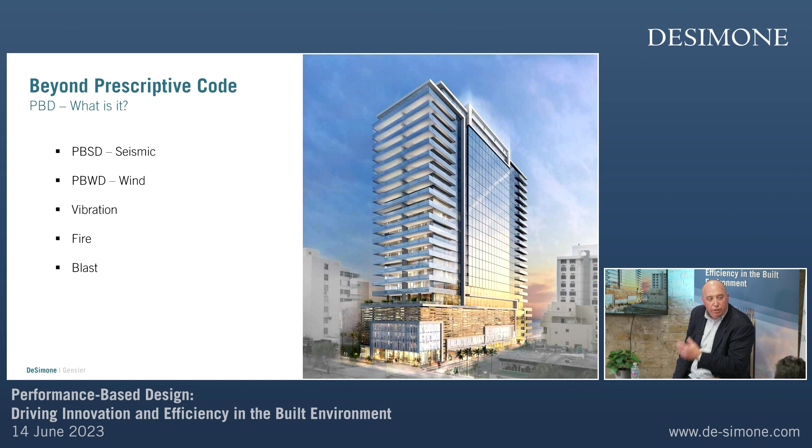What I should mention is some of these things I'm going to bring up from my past work with other groups, but currently in our office right now, we have two projects that we're doing as performance-based seismic design. This is a residential tower in Salt Lake City, which is a pretty high seismic design code. And then also a job in Puerto Rico, another condo tower that we're doing performance-based seismic design on.

And wind. A few years ago, when I didn't have much more hair, but I had a little bit more hair, all right, and I don't get any money from selling these CTBUH publications.

But Jeff was involved with this too. And since this was about 2015 or so, we put out this publication. The idea here was there was a lot of performance-based seismic design projects that had been done, and we wanted to show something that was a little bit more helpful with guidance.

So there's good examples in this, and I would say that we present it in a way that developers can read it, architects can read it, so that they can become a little bit more knowledgeable about what structural engineers do when they approach, and geotechnical engineers, when they approach one of these problems.

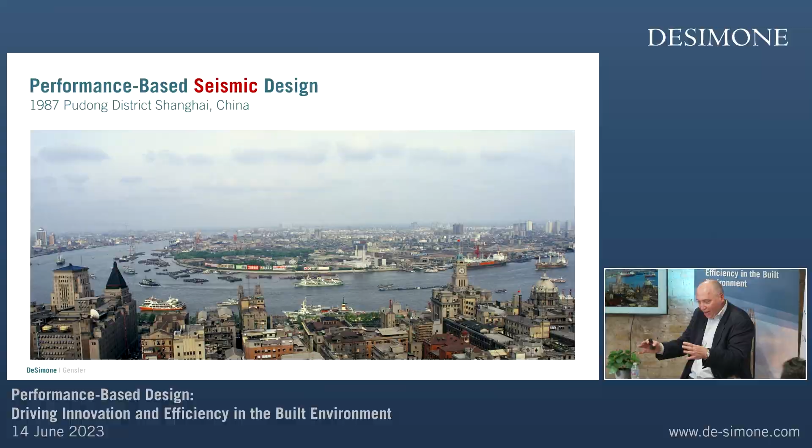Now, my background's a little bit less traditional than most US engineers who get involved in performance-based seismic design, because most of those guys hang out on the west coast of the US, like Jeff, and they're kind of in that huddle doing a lot of work on the west coast that's very specific to that region of the US.

My experience dealing with this issue was really when I began my work at SOM. So when I was in SOM's office in Chicago in the early 90s, they did a lot of work in China, and they started a whole number of different projects there. This was one of the first projects that was done there and used as a benchmark.

This is just 25 years later. It's a whole redevelopment of the Pudong district, was the Jin Mao Tower. The Jin Mao Tower was this kind of 88-story, very repetitive type of setback system. And this was used as a benchmark.

And really, you look at this building, many of the buildings that were done that were taller, like Russell, I think you actually worked on Shanghai Tower. I touched it, I didn't really work on it. Okay, it was already designed. I need to give you a new photograph of that.

Well, this was in 2013, and really what it was meant to show was how much things change and how many projects like this were being done in China. So that was my exposure, and also the whole evolution of the process. What it took to get Jin Mao through the design process and through the expert panel review and the peer review was far less extensive than by the time Shanghai Tower came along.

So why would we do performance-based seismic design? Most of the time we're mandated, we have to do it. Within the US, or if you're using IBC, International Building Codes, there's definite limits on heights of buildings and systems that you can apply in a high seismic zone. So in tall buildings in high seismic zones, or buildings that have unusual structural systems, you sometimes are mandated to use a performance-based seismic design.

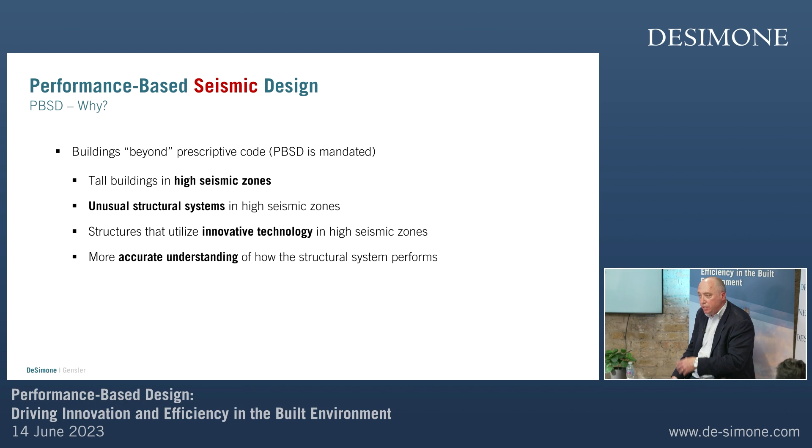If we're talking tall buildings, then we look at what are the regions of the world, where are the high seismic regions, and how do those correlate with large metropolitan centers. The ones that stick out in my experience are Southeast Asia, obviously, and then also the west coast of South America, Chile and Santiago. They're having large scale events on almost an annual return rate.

So in an area like that, the expectation by the public is not that you're going to design a building, and collapse prevention is a realistic goal. You want to be able to walk in that building the next day. And the only way you can accurately assess that is by doing performance-based design. And then also the west coast of the US.

And just to give you an idea, this is the Sendai earthquake. I just grabbed this off the internet, 2011. Gives you an idea of what kind of movements you're talking about with tall buildings. The thing that's interesting about this is many times seismic might govern, not necessarily - if you're in a high region, if you're close to a fault, of course you're really worried about it.

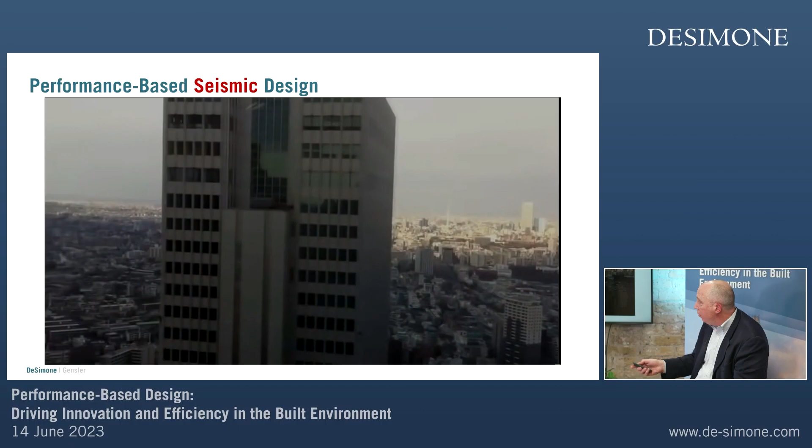But like for instance, if you look at a zone like Dubai, many of the seismic events that occur in Iran actually influence the seismic criteria you need to use for design there. And that's a couple hundred miles away - I don't know how many kilometers.

All right, so conventional wisdom, we grade these different structural systems.

We say like a bearing wall system—is this good, if we saw a rare seismic event, how well would it dissipate the energy of a large earthquake? How would it ductilely respond to it? And how can you—this is somewhat experimental. This is the current approach for prescriptive design.

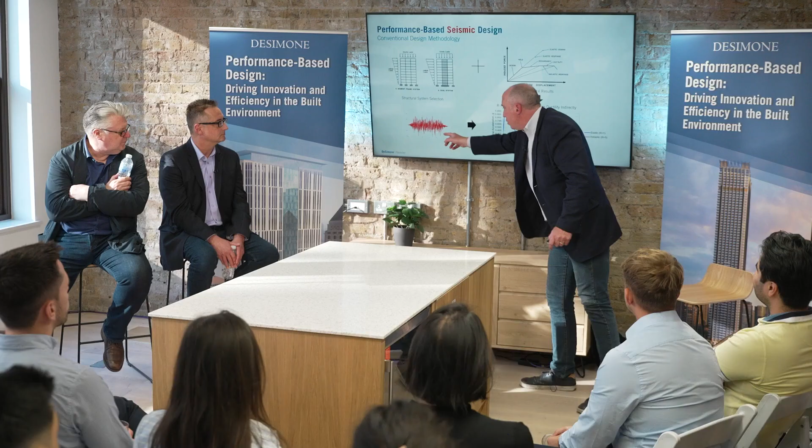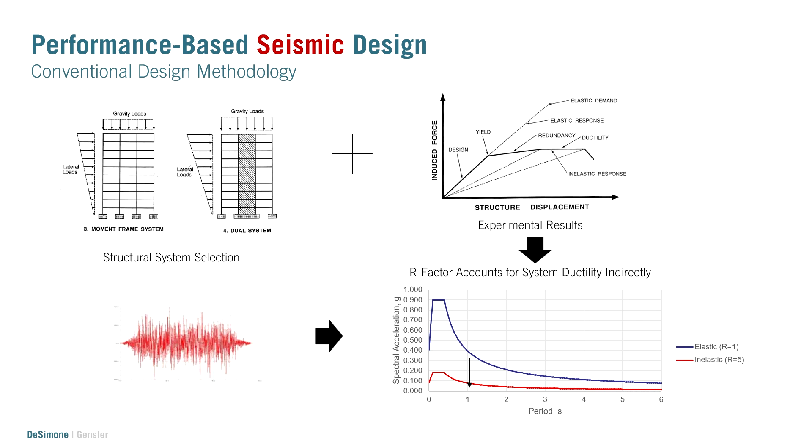So you see a time history record here, and whenever you see a time history record or a series of them, it gets represented in a response spectrum. That's kind of like an envelope of the responses a building could have based on all the ways it could vibrate. And we use these gradings of different structural systems to figure out how we can reduce the seismic loads because the building's going to respond ductilely.

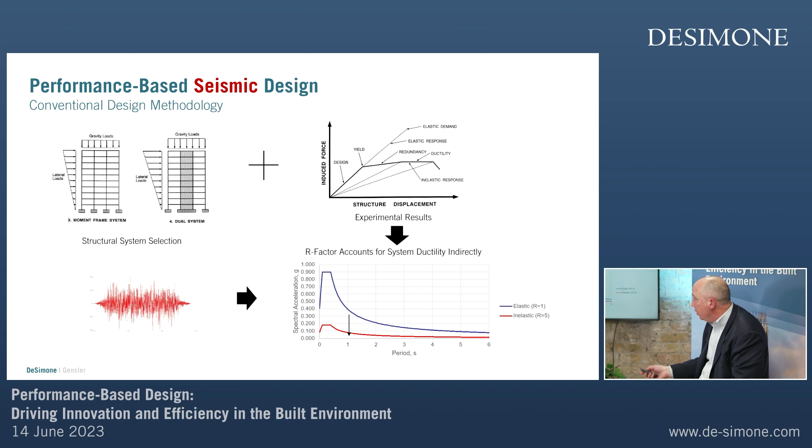It's not going to see the full elastic, the full force of the full G's of an earthquake. It's actually going to respond in a way where it's more ductile and the loads are reduced. So the better the structural system, the more ductile it is, the higher value we reduce that response spectrum when we do conventional design. So what are the disadvantages with that?

There's a value, that reduction factor is a seismic reduction factor. It's this R value, and it's used in Eurocode as a Q value—kind of a similar concept. And it's qualitative, it's less direct, it's less accurate, and it has less definition of areas where special detailing is required. You just kind of think about those areas, but you don't directly assess where that ductility occurs. There's less freedom with definition of systems.

And then you hit something like this: you have a bearing wall system, you read in a catalog, its R value is 4 or 5. What would you even call that? You don't even know—CCTV would be like something that would not even fit into any definition.

So there was a quantification document that was put out where they attempted, when computers probably didn't have the same computing power, to define those types of systems that didn't fall into the regular list of structural systems. But by the time you get to the end of all this work, it's almost like now you should just directly assess things.

And so what we opt for when we're doing performance-based design is we just take that same time history, instead of going through the response spectrum, we're putting it into a building model that has all this direct ductility of link beams and walls directly modeled.

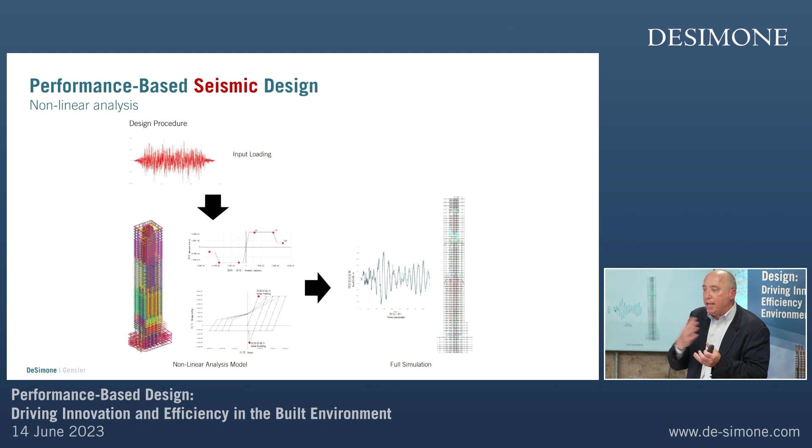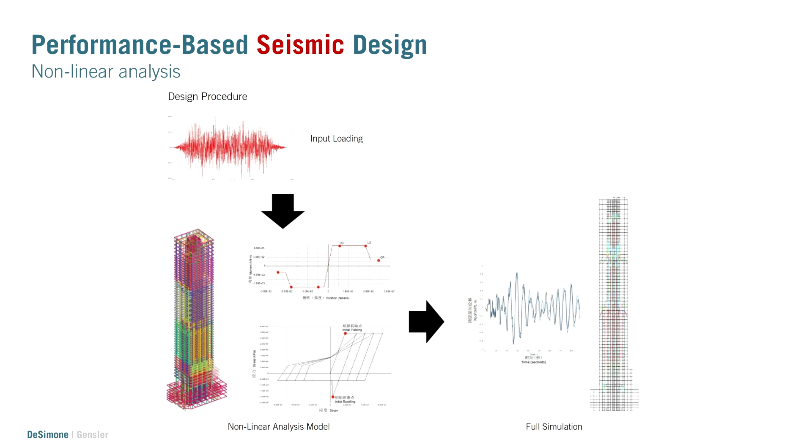So the building's not responding elastically anymore. It's not a linear approach. We're actually seeing some of those elements fail—they're not failing, but they're cracking and yielding. And that is the actual development of the reduction and the ductility in the structural system.

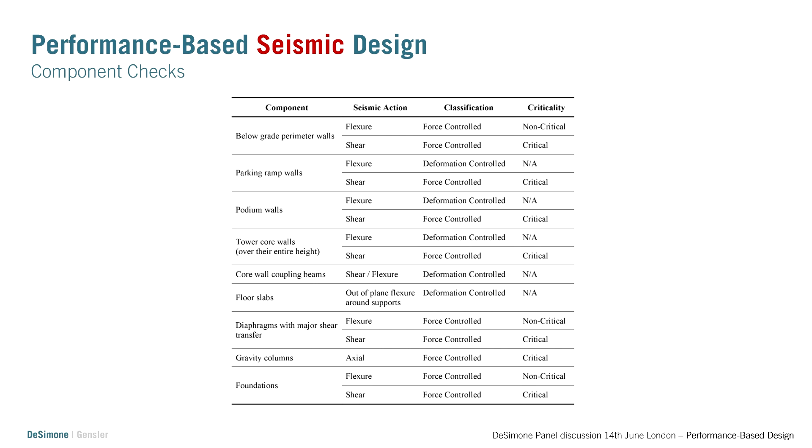And then we keep track, all right? And then looking at all these elements, there are still some elements when we do the performance-based design where we're looking at them as being force-controlled elements. So those are strength checks, the same way you would do a normal strength check in a building, and that would be like for gravity columns—things that we don't want to actually yield or see any kind of cracking.

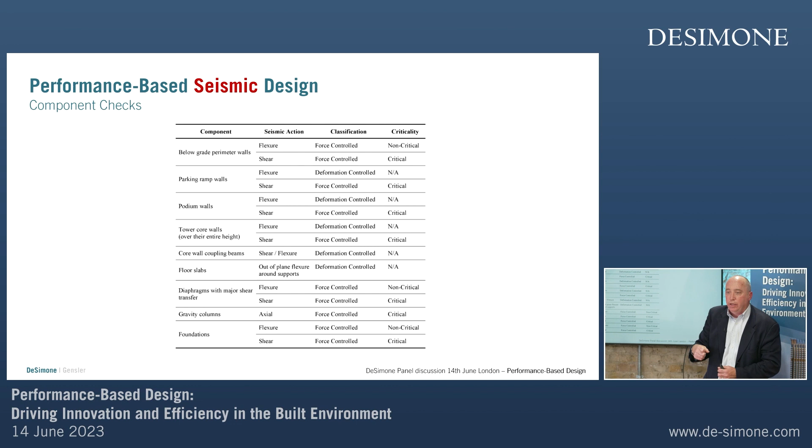But elements you intuitively think about, like coupling beams, will have a lot more deformation in them, and you'll see a lot more ductility. Also in tower core walls, yielding of the vertical bar, hinging. And that allows the building to respond in a way that's safe and offers a good fuse point that we can investigate in detail.

When we do performance-based design, it's a two-step process. Usually we look at time history records that are correlated with the green response spectrum, and those are like 75-year to 100-year events—the building is intended to respond elastically, nothing goes nonlinear. But then we look at the rare events, which are like the 2,000 to 2,500 year event, where all of this ductility is actually developed.

And these are similar return periods to the Chinese code—so that's why you see all the translation there.

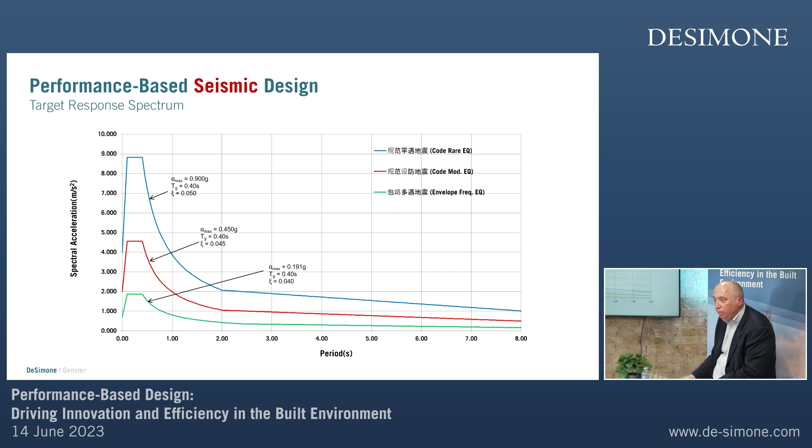So kind of the lay of the land in the US: traditionally prescriptive loads, prescriptive codes deal with these R values, these seismic reduction values. There's height limits for certain systems in high seismic zones. And performance-based seismic design is not just done for new construction when you're over limit—you also will do it for retrofit sometimes. And there's a particular code dealing with that.

Eurocode 8 has similar prescriptive rules to the US with these seismic reduction values, but they're called Q values rather than R values. And as I know it at this point, there are no height limits for certain application of different systems.

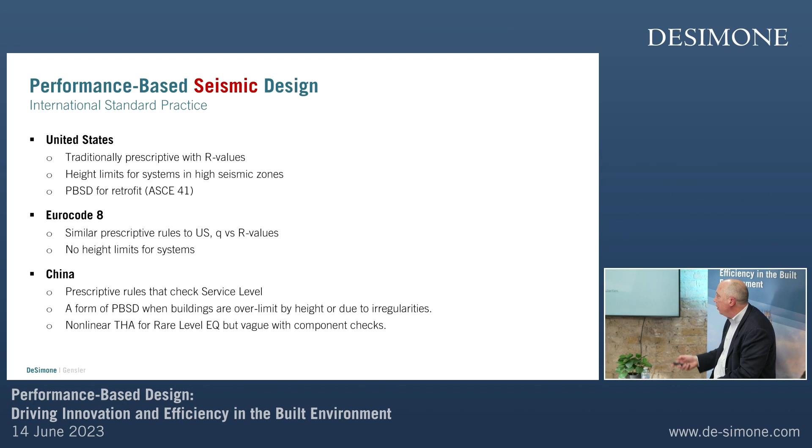There are good publications with a long history of being utilized for this. The TBI peer document steps through a process for tall building design when you're doing nonlinear analysis. There's also other codes, like the Los Angeles Tall Buildings Structural Design Council document, which they've kept updated. It's very similar to TBI, but has slightly different guidance. The big boost for this as a design process has been ASCE 7. The 2016 version actually had nonlinear analysis and performance-based design included, and that's now been enhanced in the 2022 issue.

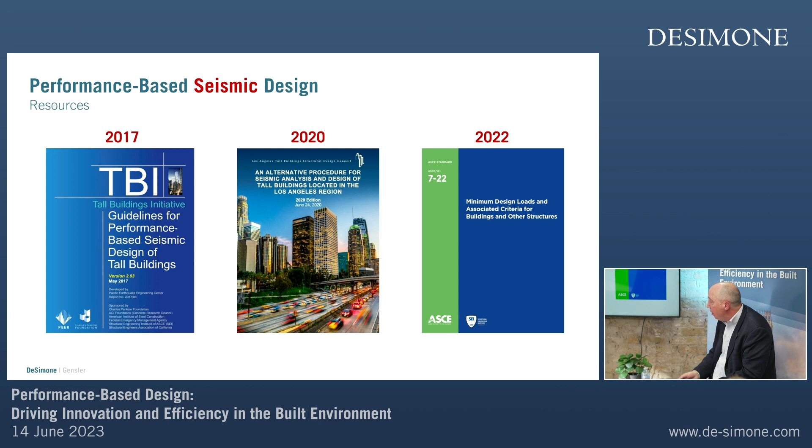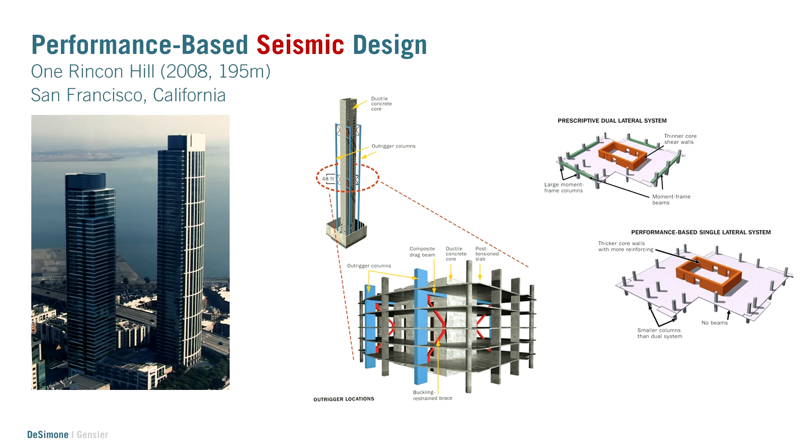Even though some form of performance-based design was being utilized in the US in the late 90s, this is a classic example of why you might want to utilize a system like this. Similar to London, any residential tower project that's a post-tension slab with a bearing wall system, you want to limit the number of downturns in the formwork, because any extra formwork is very expensive. This would have been cost-prohibitive and a restricted system in the San Francisco area prior to the development of performance-based design, because to get a code-compliant building, you would have had to add a ductile frame on the outside, which would have been cost-prohibitive. So by doing performance-based design, you're able to get something like this through the approval process.

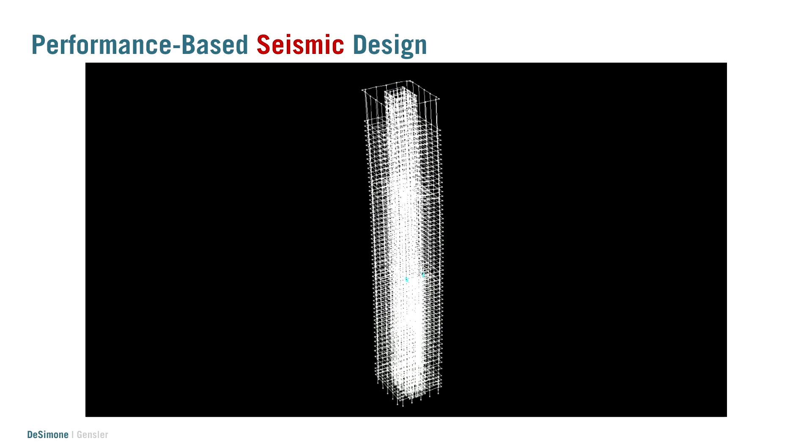This is a building we did for Samsung headquarters in Beijing. The interesting thing is we pursued the idea of innovative design, so we looked at a couple different options for the client, Samsung. Instead of just using outriggers and a belt truss at the mechanical levels, we actually used the idea of viscous dampers there.

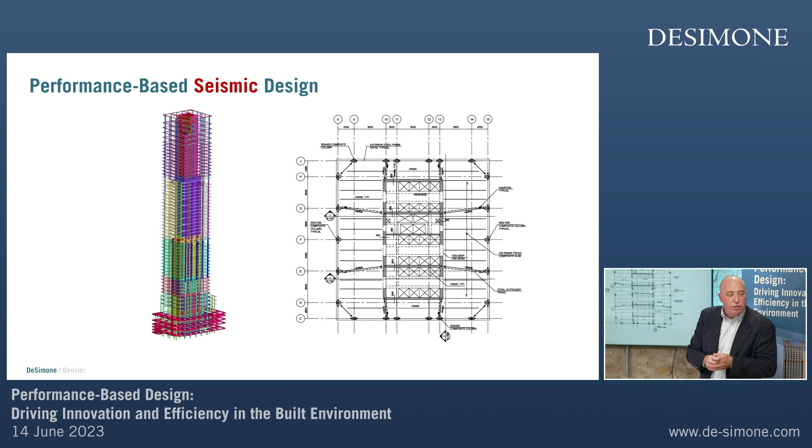Viscous dampers are hard to model statically because they only pick up load when there's velocity, so you really need to take them through a time history analysis to see how they'll respond.

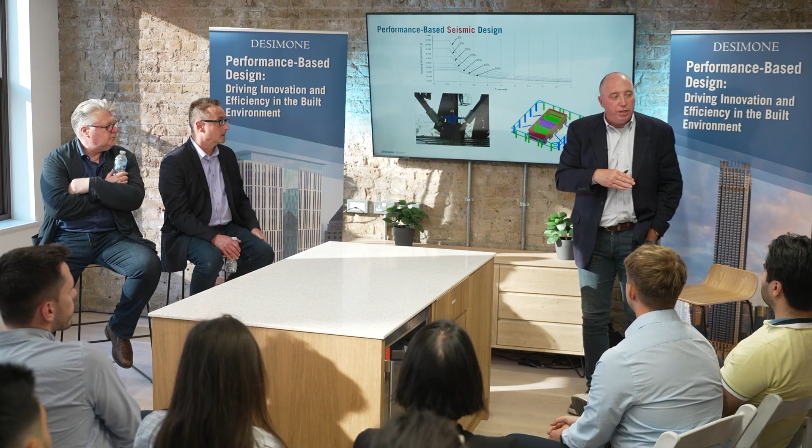Yeah, so they use these hydraulic systems. This is what they look like. They used them on Torre Mayor in Mexico City. That's a pretty old building. Yeah, but there they were used more just in the exterior frame to get an additional amount of damping.

When you look at damping in systems like this, it has the same effect as reducing the seismic load with a higher R value, because you just drop the response.

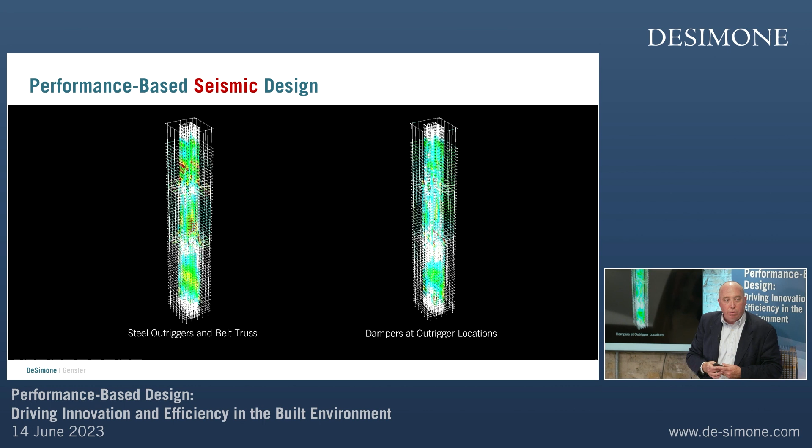What we were able to prove to Samsung, the client, was that if we do a conventional steel outrigger and belt truss system, you see a lot more red there, which equates to more damage you'd see for the same seismic event. The building would respond more linearly with the viscous dampers in play.

Another way to illustrate that is to look at the total energy dissipated by a rare event. The viscous damper system has a longer period for the building, so it actually sees less total energy that needs to be dissipated. The zone under the red here is the energy dissipated by the structure - that's walls cracking, bar yielding a bit, it's damage, though not beyond a certain point. But you still see that with this more conventional system, you only have about 40% of the damage with the damper system as you do with the conventional system.

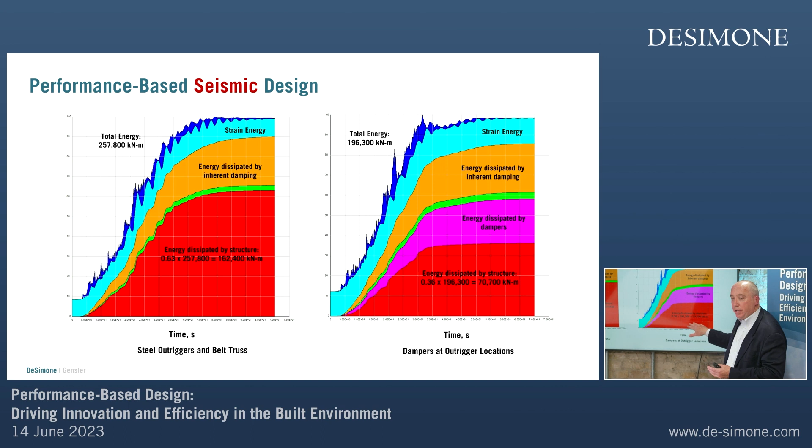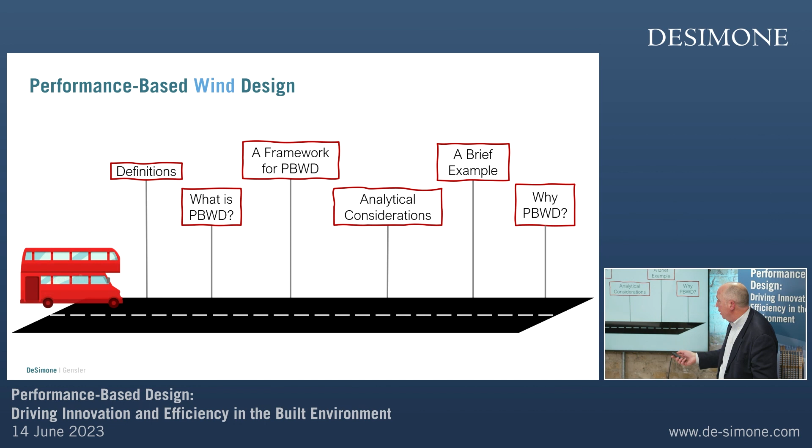And then I think one of the things Jeff is going to hit on is... whoops, let's see, I thought you... I ruined your video. Yeah, I was supposed to have a video right here.

So there's this idea now that what we're thinking about utilizing is a viscoelastic link beam, or coupling beam, because there's some idea that if you are able to replace some of the coupling beams that are working really hard in the system, you can isolate where the energy is dissipated and actually monitor it in case there's a rare event, and replace those elements if there's a lot of damage to them.

So anyway, Jeff. Excellent. Thank you, John.

So what I'm going to talk about now is performance-based design related to wind. I put this little cartoon together because I'm going to be jumping around a few topics. First, I'm going to go over a couple definitions so we're all on the same page.

That relates to overturning moment for wind and what that exactly means. Then I'm going to talk about what performance-based wind design is, contrasted to the typical code level design. Then I'll talk about a framework for performance-based wind design that is currently coming out in the US. And as we'll see, performance-based wind design has some computational challenges, so I'm briefly going to address what we're doing at DeSimone looking at related to analytical considerations and how to do this work effectively.

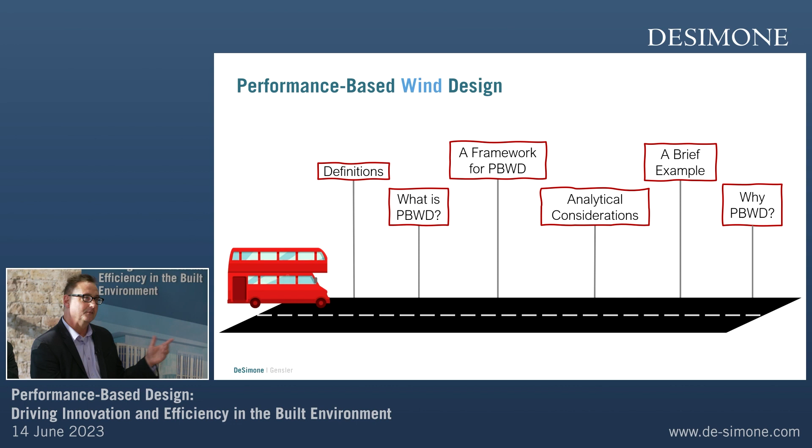And then we'll have a brief example of a building that we currently have in the office. And the last question, we're going to do why PBWD—I'm putting that at the end, and John had his at the first, because I think once you look through this, you might have a better sense of why you might do it.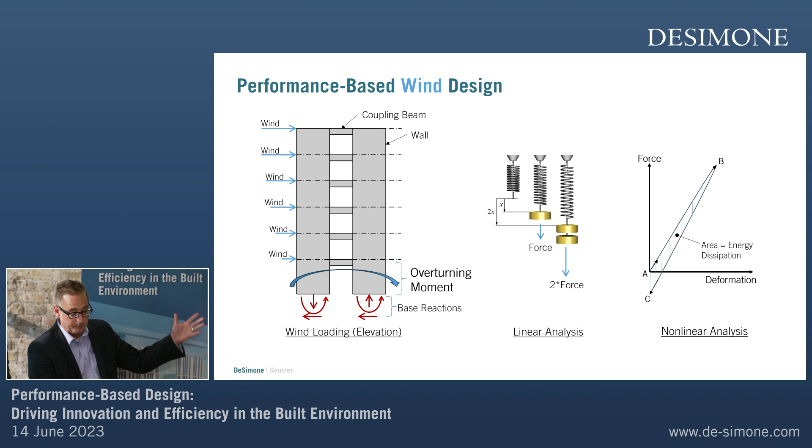And just to summarize what John already talked about: force-controlled versus deformation-controlled elements. A force-controlled element is a linear element—like the middle cartoon, if you apply a force to a spring, it displaces X. If you apply 2F to the spring, you get 2X. That's a linear response. The one on the far right is what you'd see in an element that is detailed and designed ductilely, where you load it up to a point B, and then when you unload, there's some area between the loading and unloading curves—that's the dissipated energy in the system, which could be a coupling beam or a damper, among many other things.

So here, PBD, what is it? Well, what I'm showing you is what it's not. This is prescriptive design. On the left, I have basically the floor plan—that's out of the ASCE 7 directional wind procedure, which is what you would typically do in a building. So basically you have all these load cases, and you apply those loads at every floor level, and then you get your overturning moments for that particular wind direction.

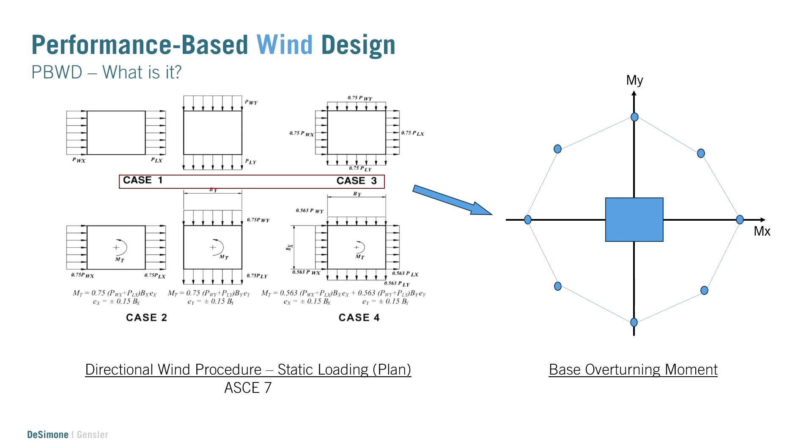So if you look on the right, we have something I like to call a stop sign plot. Basically it's a plan view of the building at the base. The little blue thing is the building. And when you calculate the moments for those various load cases, you get an envelope of the design at the base of the structure.

Now, PBD, what is it? I think the most important thing is that instead of applying static loads to the building, you apply wind time histories as developed by the wind tunnel. So on a particular floor, at some coordinate picked by the wind tunnel, you're going to have wind Fx versus time, wind Fy versus time, and a twisting moment about the center of the building at each level. The three squiggles on the right are basically wind time histories—for this example, about 36 seconds, though typically they're 1 to 2 hours.

Typically they're 1 to 2 hours. If it's the top one, you notice how it's below the 0 point—that's basically because the wind is continually pushing on one side of the building. So that's going to be the critical wind direction.

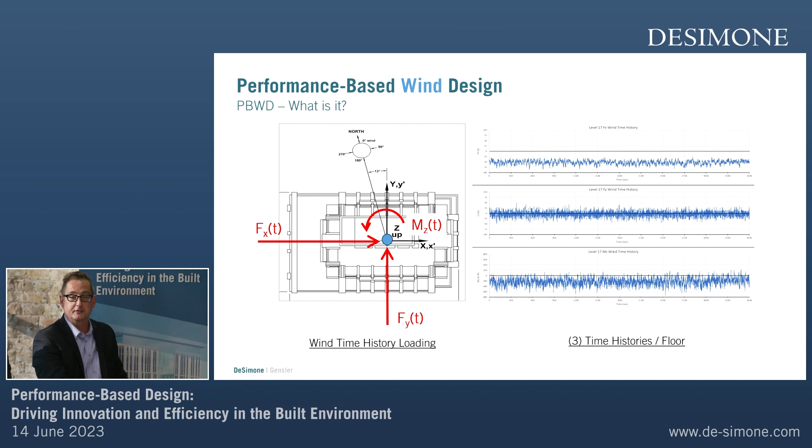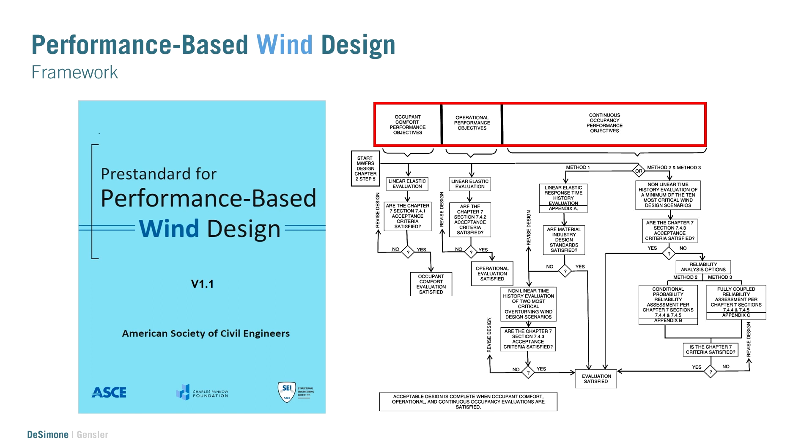So this is the framework that has come out recently. I think the first edition of this was 2019, and this version 1.1 pre-standard came out a couple months ago. I'm not going to go through the flow chart on the right, but the important thing to take away is that it defines 3 performance objectives—if you look inside the big red box, that's what the performance objectives are. And one of the big things that might be interesting to everybody in the audience is they describe something for non-structural elements.

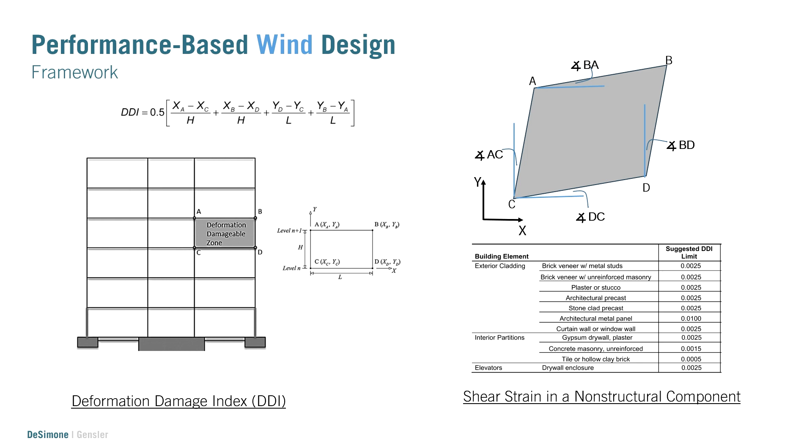Sorry about the equation, but basically it's a way of quantifying how much racking you might get in a building. Let's say you're next to an elevator and you want to limit how much distortion demand there is. So basically, distortion demand is, if you take that little gray area and you deform it, distort it, it's basically an average of those little angles. And then the table below is kind of some recommended deformation demand index limits.

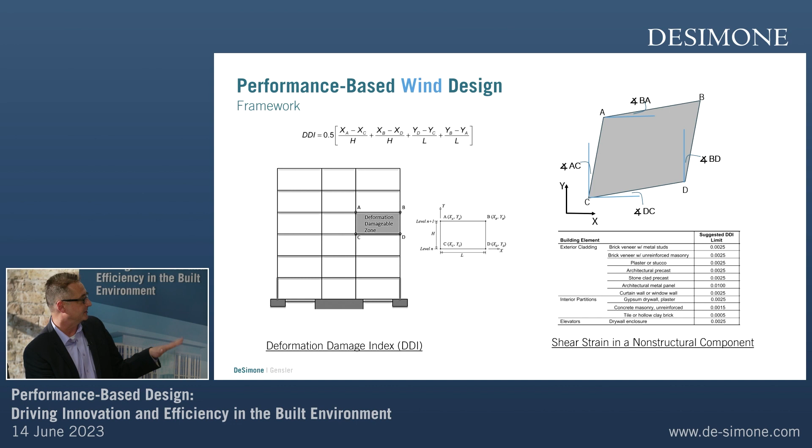That's from a document developed by the Applied Technology Council, Design Guide 3, which is specifically at serviceability for wind loads. That's something that's really interesting that's in the pre-standard. There's like 5 pages of the framework. I'm just summarizing basically 3 of them for the main wind force resisting system. It also covers the cladding and some other things.

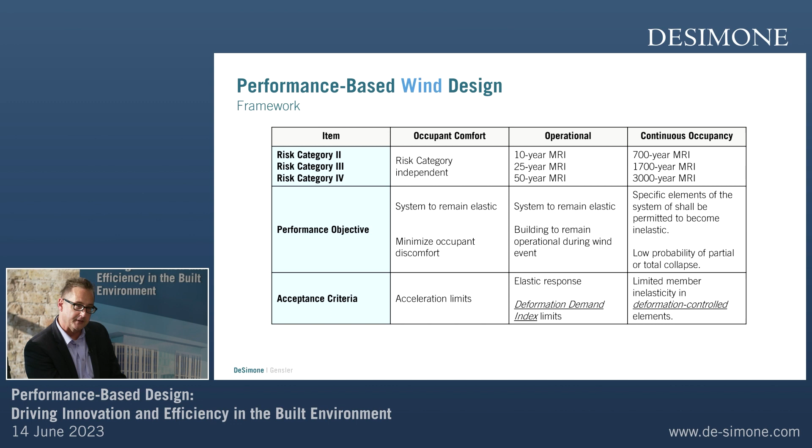For risk categories, it gives you the recurrence interval for the winds you need to consider. For the performance objective, typically it's remain elastic, unless you're at continuous occupancy, where the new thing in this PBWD is you actually allow some of the elements in the building that you pre-select to go inelastic. So think back to that inelastic curve that I showed a few slides ago. And then the acceptance criteria, the middle one is the DDI index, acceleration limits like we typically have done for buildings, that hasn't changed. And then the far right is basically deformation limits on specific elements that are nowhere near how much deformation you'd get during an earthquake. It's a lot smaller.

Perform 3D is used for performance-based seismic design. ETABS is used for routine design, but it can also be used for nonlinear analysis. OpenSees is something that was developed at Berkeley 30 years ago. One of its features is it's fast and open source. And WIRA is something that was developed by Seymour Spence at the University of Michigan specifically for doing Monte Carlo estimations for wind stuff. So that's a great program.

In ETABS, a firm did a PBWD job, and it took them 1 month to run 5 wind time histories. So you can see that we're generally concerned and interested in picking something that might run faster. And WIRA actually uses OpenSees as its input file, so if you work in OpenSees, that's where you want to head.

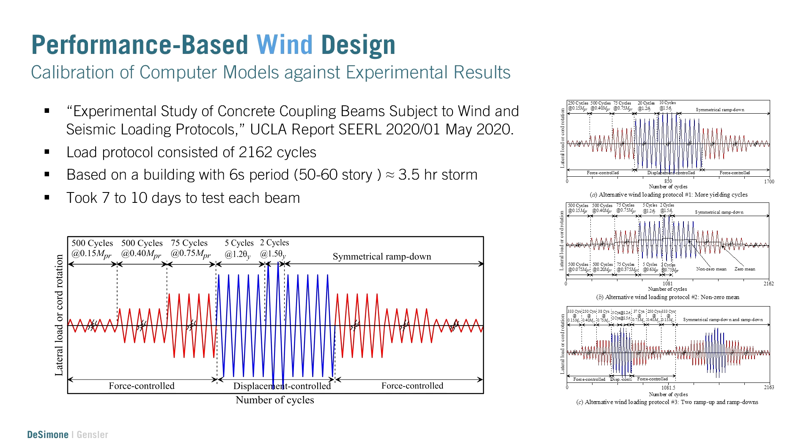So what we have been doing at DeSimone is, because the wind loadings are such small amplitudes, we have started to calibrate actual experimental data against nonlinear elements in those 3 applications. One of our consultants was involved in this. This is some wind protocol testing that was done at UCLA. I'm not going to go through the details, but there's about 2,100 cycles. 1.2 yield is a very small deformation compared to seismic, which might be 5 or something like that. And so they went through various protocols there.

I'm not going to show you a bunch of stuff, but basically, if that coupling beam there on the far upper right, if you were to shear it like this, the y-axis is how much force, and the x-axis is how much it deforms. You can see that this is actually really excellent calibration for the small deformations considered. And the areas in between those loops is the hysteretic energy dissipation that you can get.

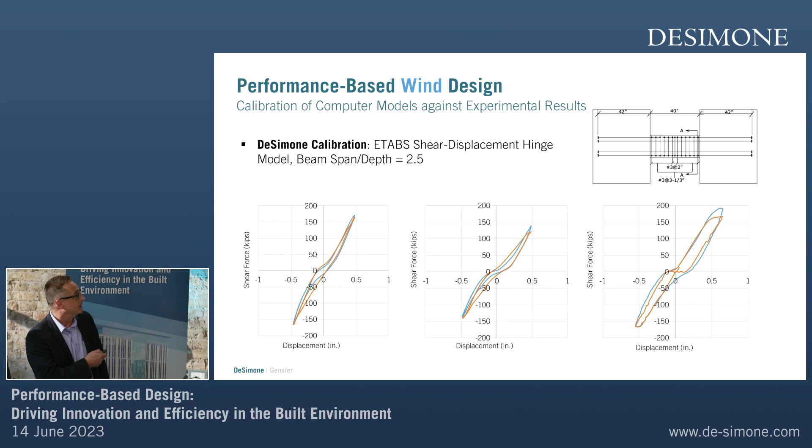Okay, a brief example. This is a building I'm going to call structure 8B. It's 83 stories in a hurricane region, 74 meters per second wind speed. And then, since you have 3 time histories per floor times 83 floors, you get 249 separate time histories for each model.

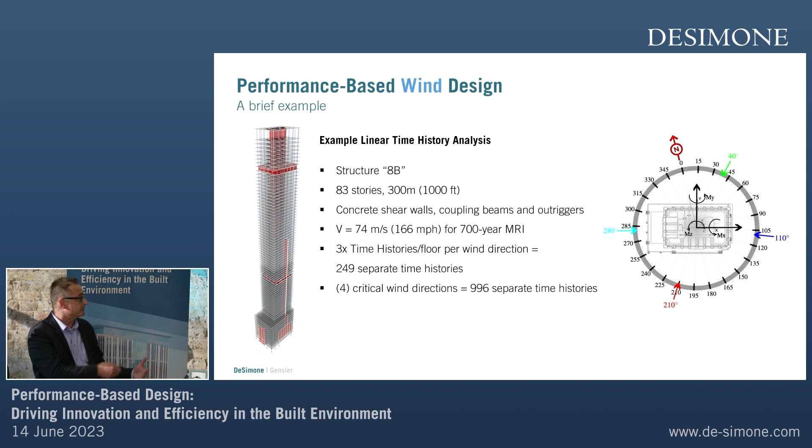Whereas in a seismic analysis, you typically have X and Y at the base. You might have UZ, but typically not. And if you have 4 critical wind directions, you basically have 996 different time histories you have to input to the model. So there's a major data management challenge, and we've developed a lot of custom software to automatically populate the models and convert them from ETABS to OpenSees. So we have a whole suite of software tools you really need to accomplish this work.

Here is a small subset of one of those spaghetti plots for the 40-degree direction. This should play, and you can see this is a zero mean wind response, and that's about 10 seconds out of, I think, a 2-hour time history. They have about 20,000 points per time history.

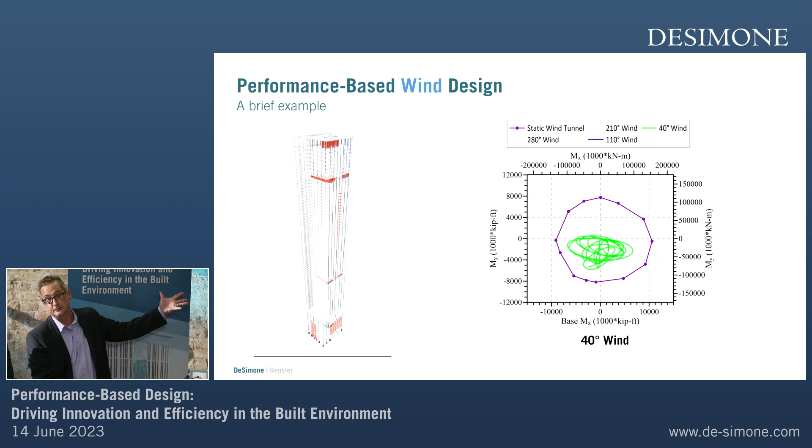On the last slide, we work closely with Kinetica. Michael Montgomery contacted me about 4 weeks ago and said, hey, we got some extra dampers in our lab. I said, if you send me the Brickell model with the time histories, we'll run it and design some of their VCDs in the building. The cool thing is that for the most critical VCD, they actually took the calculated time history demands and tested it in the lab. So now we're able to get the actual energy dissipation in the lab and compare it to what ETABS gives us, which gives us more confidence that we're doing the right thing.

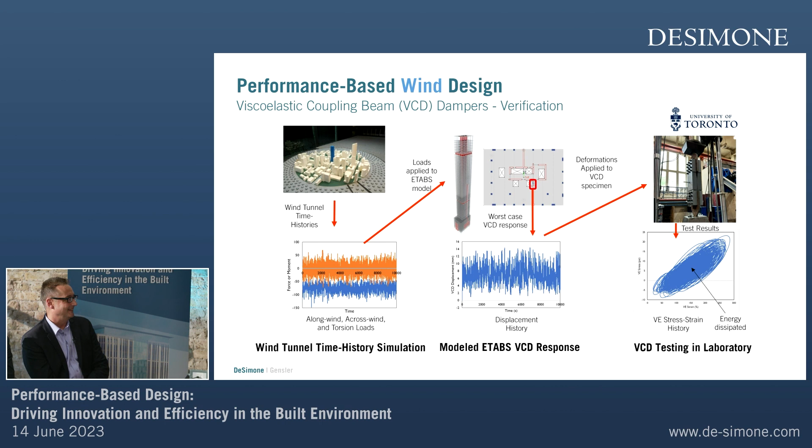If you send them 8B. 8B, oh, oops, my bad. Less of the private jokes, guys.

Okay, pros and cons—I just picked 3, could be a lot more for discussion later. Pros: a lot of times when you have a high seismic zone and a high wind zone close together, the old wind directional procedure would make you design very shear, very flexurally controlled walls, so you get a lot of flexural steel. The problem is if you get a lot of flexural steel for seismic, that's not good, so it would actually make the design worse. PBWD would allow you to avoid that, with potential reduction in construction costs and the ability to consider more innovative technologies.

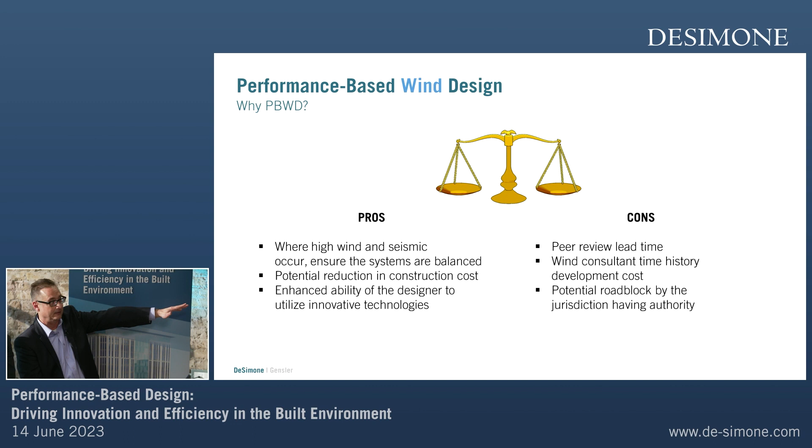Cons: peer review time, the wind consultant's time, and also whether a municipality is going to even let you touch this stuff. So that's really it for me.

You want to switch spots? So big arrow, yeah, why not? Okay, I'm not sure quite how to follow that. Don't have quite so many weird equations.

So maybe I should introduce myself a little bit. I'm Russell Gilchrist. I'm a design principal in Gensler's London office, been at Gensler about 12 years. Initially in the Beijing office, then you're going to see some Chinese projects, then Shanghai, then Chicago, and now I'm back in London.

These are just some of the projects. Two of these, actually more than that, are in London. Maybe some of these I worked on with John, actually.

So these are some of the tall buildings, but I'm not actually going to talk about tall buildings really. They're kind of mid-rise—I think there's 2 40-story buildings and 1 20-story building. But I know a little bit about wind, not quite as much as Jeff, but enough to keep me out of trouble.

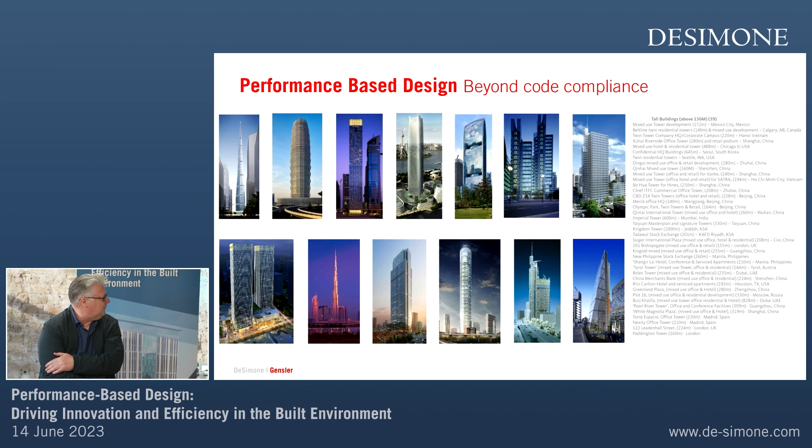So for me, as an architect, performance-based design is slightly less prescriptive. There's obviously a bunch of criteria we always get when we start a project, and what I try to do is utilize as many passive moves as possible, particularly from a building systems rather than a structural perspective, so we're not trying to cram a lot of kit into the building just to mitigate an architectural idea. That doesn't always work, but that's kind of our starting point.

A lot of performance-based design, as John mentioned earlier, is beyond code compliance. So I'm going to show you 3 China projects. Trying to play around with Chinese code is pretty dangerous because it's very prescriptive, and the building code official doesn't want to make any decision outside the code because he has a boss, and no one wants to take responsibility for that kind of discussion. So it's kind of difficult to push the envelope. But this is actually a presentation I gave a little while ago, covering 3 projects in 3 slightly different places in China.

The reason I think this is quite interesting is that Beijing, Shanghai, and Shenzhen have quite different climates. China's a pretty big country, so Beijing is pretty cold in the winter and it gets pretty hot in the summer. So it's a heating and cooling kind of environment, a little bit like London, but slightly more extreme.

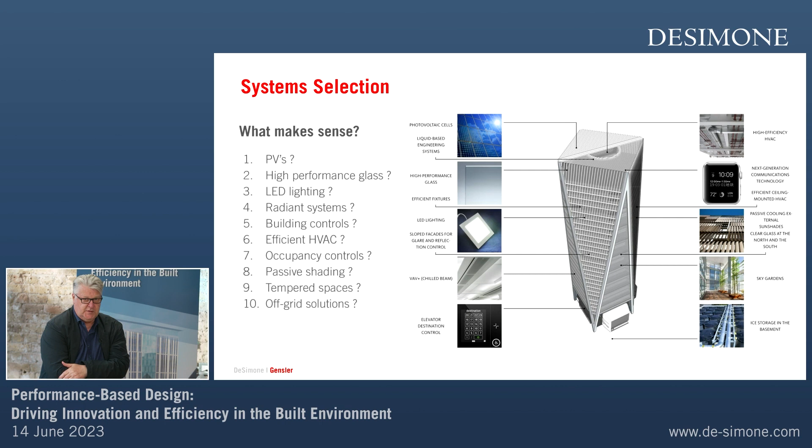We're typically looking—we'd love to use kind of water-based systems rather than air-based systems just because they're more energy efficient and it's also a better comfort condition, but we don't always get to use it, and clients don't always like pushing that kind of technology.

This is a project that I did for Harbin Bank. It was initially going to be the headquarters building for the whole bank. Harbin's a place in northeast China, and this is a bank going more national across the whole of China, and they were going to move their headquarters into Beijing.

The brief from the client was he wanted the most elegant building in Beijing, which, believe me, is not a tough ask. Typically in China we do multiple options—I think this was option 17 or something ridiculous like that. But he went for this one because it looked like a bulging wallet to him. He's a banker, so he kind of liked that idea. I was trying to put together a more sophisticated argument, but I was quite happy that one way or another he liked it.

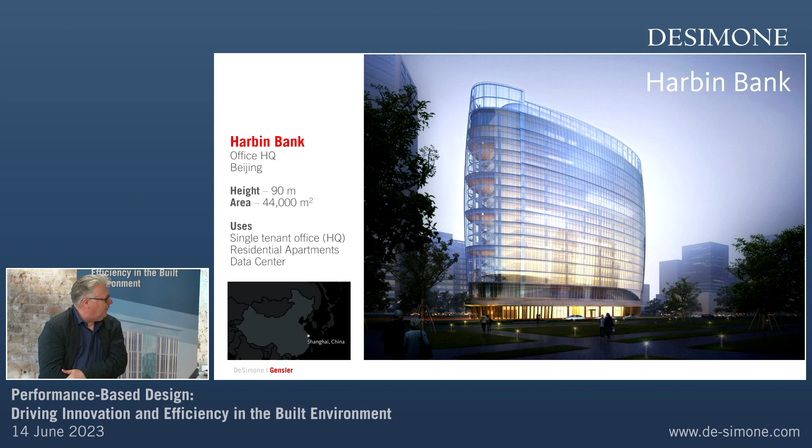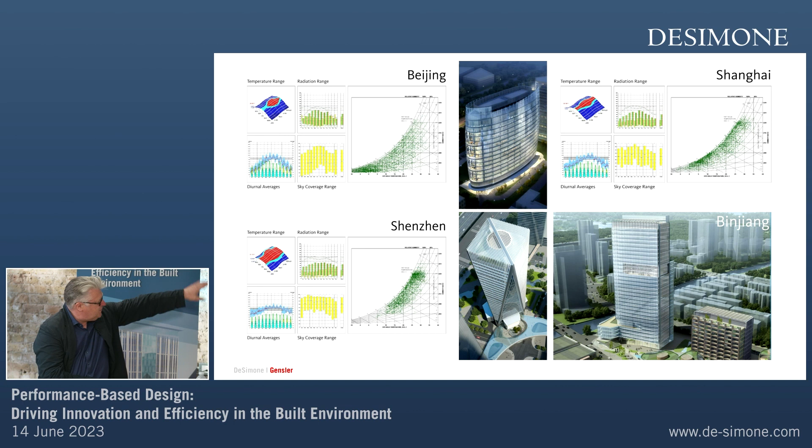So this is the plan of the building. Let's talk about air quality in China. That's a good day in China. I was in Beijing for, I think, a day short of a year, and I think I saw blue sky on 4 days through a full year. That was probably the worst day I ever had, the one on the top right. But pollution is a huge problem, or at least it was.

It tends to go away when they're holding a big major event like G8 or G20 because they just shut down factories for two months beforehand. But climate and also environment played a big role in terms of how we approach the facade design.

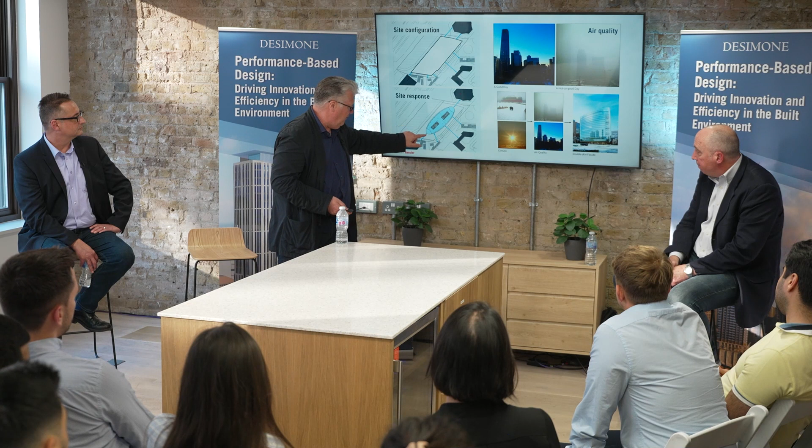You can see this kind of elliptical twin core arrangement. The outside skin is actually single glazed, so apart from a few custom pieces that we had to bend or curve, about 96% of it is flat panel. The inside is double glazed, but faceted, so we could just use standard double glazed units, because a lot of these great architectural ideas usually get value engineered, so we're trying to think ahead of the game.

The idea was that there would be a blind system in the cavity, which they actually have. So on sunny days, on those few sunny days in Beijing, an automatic blind system—the same system we deployed on Pearl River Tower—uses a photocell on the roof that tracks the angle of the sun. If the sun hits the facade at any given point, east or west, the blinds come down wherever there's solar gain.

Now, the interesting thing about having a slightly curved facade is that the whole facade wouldn't necessarily attract the blinds coming down, so we'd still get daylight.

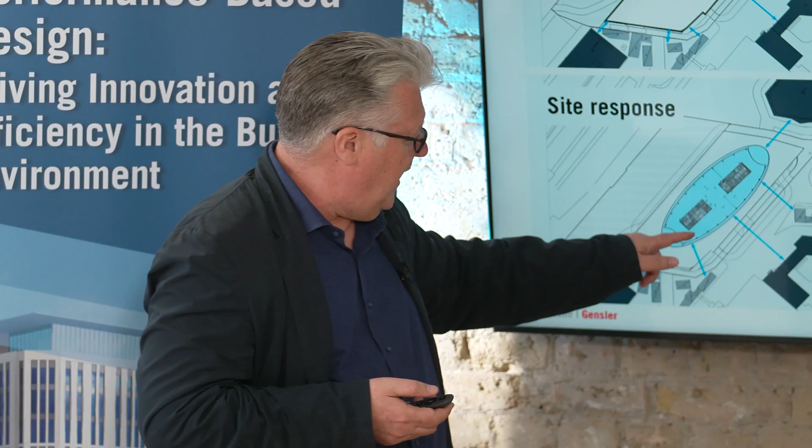The idea was that in the summer, the blinds would come down so we didn't attract the solar gain. But in the winter, it does get very cold, occasionally, and we were trying to trap the hot air in there. So the blinds would have been up, trying to trap that air in the cavity.

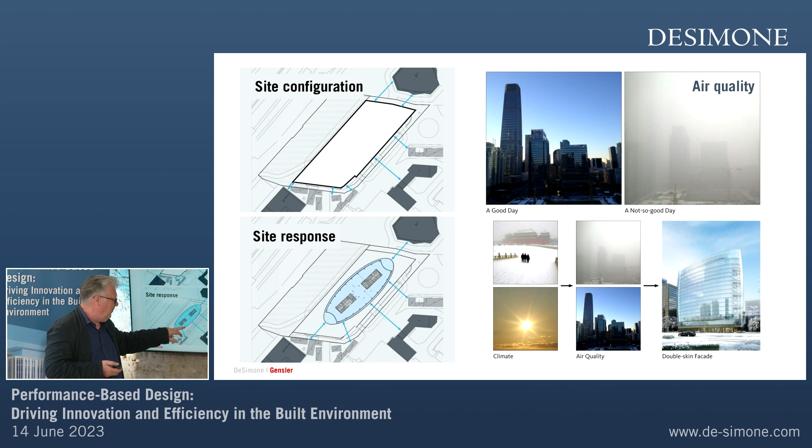So we could put it into the air handling unit system to pre-warm the floor space. It's pretty sophisticated, but we didn't get very far because the code officer wouldn't allow us to do it. He considered the cavity to be an atrium, and in Chinese code that attracts a whole atrium code, so we had to fire stop every single level, every four and a bit meters. We had thick glass you could walk on because we had to access the cavity, which is about 900 millimeters wide.

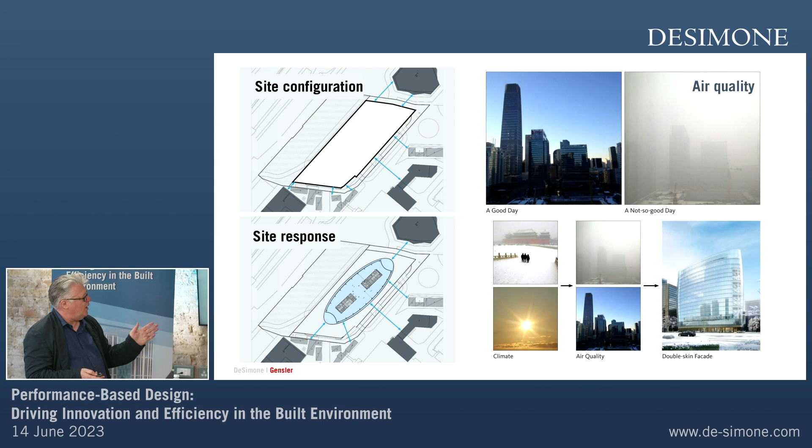So it's quite a sophisticated idea in terms of performance-based design, if you like. We did a lot of summer and winter analysis trying to figure out how this would all justify itself.

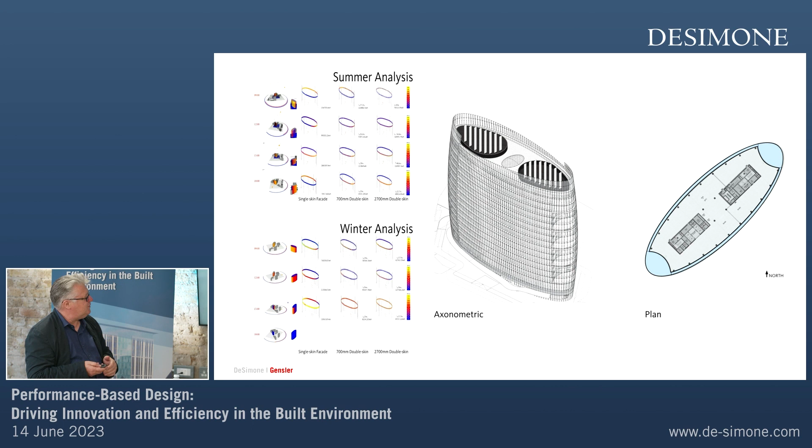So this is a winter condition and a summer condition. We talked about having a winter duvet and a summer duvet—you obviously want more TOG in the winter than in the summer. So the idea was that in winter we'd try to heat up this cavity, whereas in summer we're trying to keep the hot air out of the cavity, or if it's in there, extracting it out or getting rid of it.

This has been built, by the way.

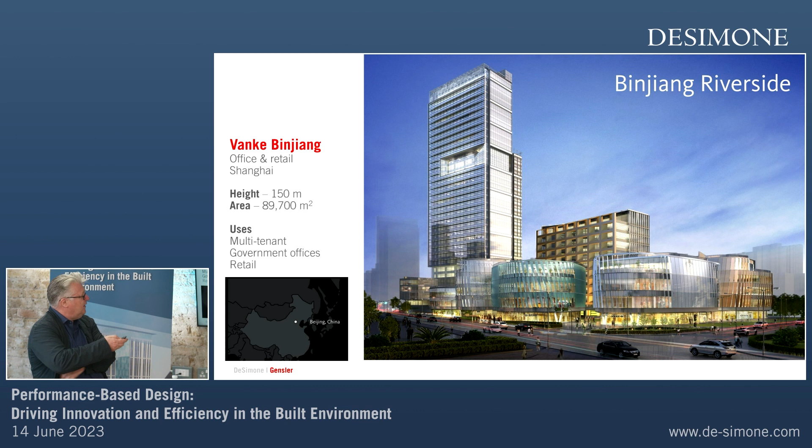So now this is the second building, in Shanghai—slightly different context. I hope I've got a site plan. Yeah, so it's right on the river. We had quite a narrow plot area to actually build something in. The view to the east is not so good, but the view to the west, south, and north is the Huangpu River. Jinmao, the project that John showed, is kind of down here.

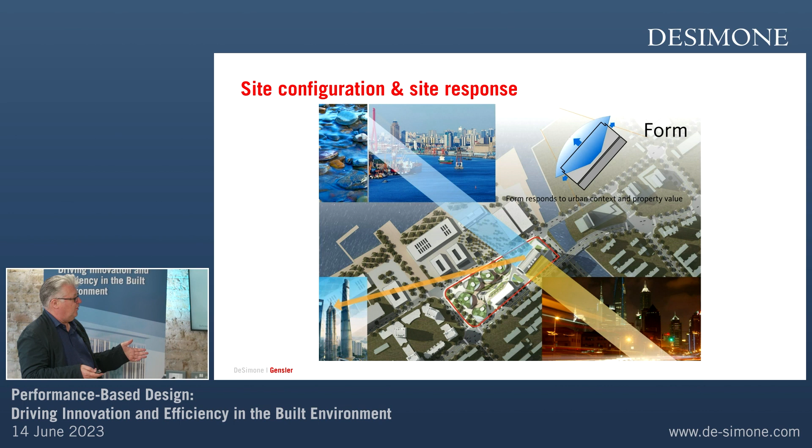So what we were trying to do is really optimize the view to the river as much as possible. Again, it's not just about building systems, it's about what the occupant experience in the space is. We wanted to give as many people as possible a view of the river, so we had an offset core placed on the eastern side—partly because that allowed us to maximize the view, but also because it shielded or mitigated the less good views to the east.

You can see in this diagram what we were trying to do—it's not a particularly tall building, I don't consider 150 meters that tall, it's really mid-rise. But we had a slight step to try to acknowledge the other buildings. It's certainly the tallest building in that particular part of the river, but we did a lower step to try to acknowledge the scale of the other buildings.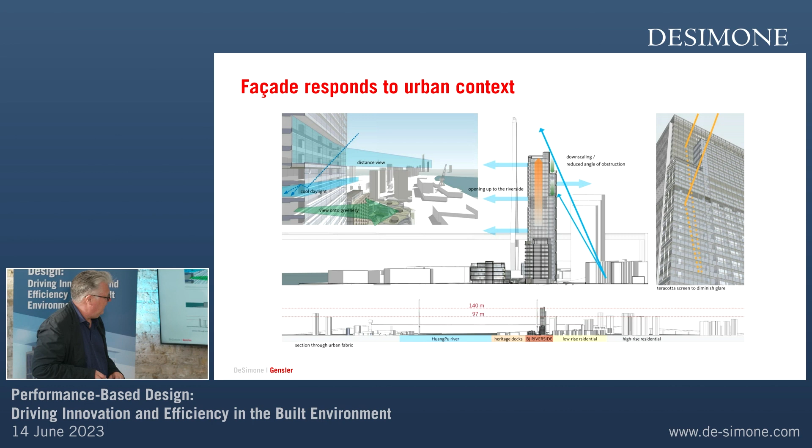Again, we worked very closely with a guy called Peter Simmons—he's ex-Arup, actually independent now, lives in Holland, and had a practice in LA. He did a lot of our energy analysis. So we'd give him crazy ideas about fixed shading, and he would analyze it and say, well, this is better than that, and so on.

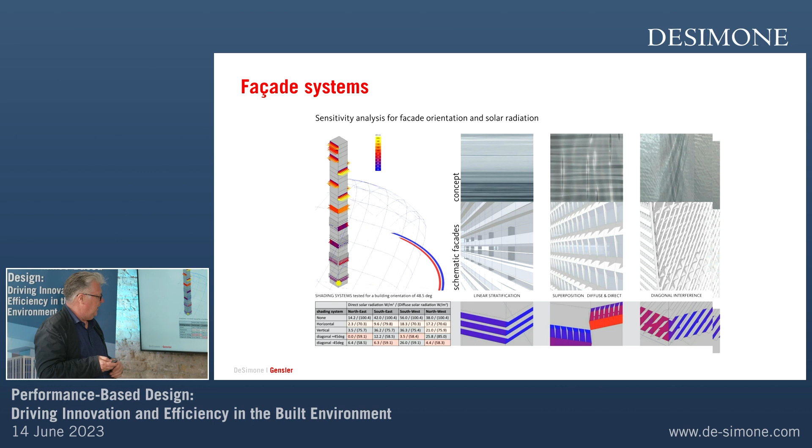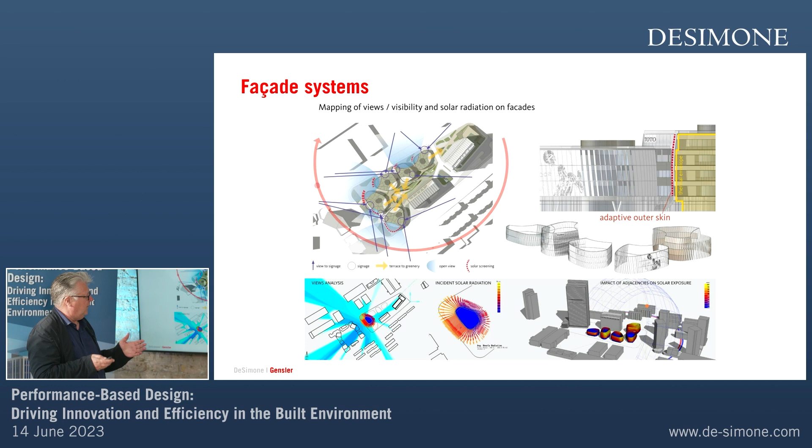Again, trying to optimize performance through the architecture—there's no active system like Beijing here, this is a purely passive approach to keeping the sun out and the building cool. The other part of keeping the sun out is still trying to maximize natural daylight, which is a weird trade-off, because in China, even in Shanghai, there are a lot of dull overcast days. So we developed all this solar shading, but we only ever really use it on certain days of the year—it's kind of interesting.

So again, with the offset core, we've got no sunlight or daylight coming in from the east where the core is adjacent to the floor plate. The two ends actually do have daylight, as you can see from the plan here.

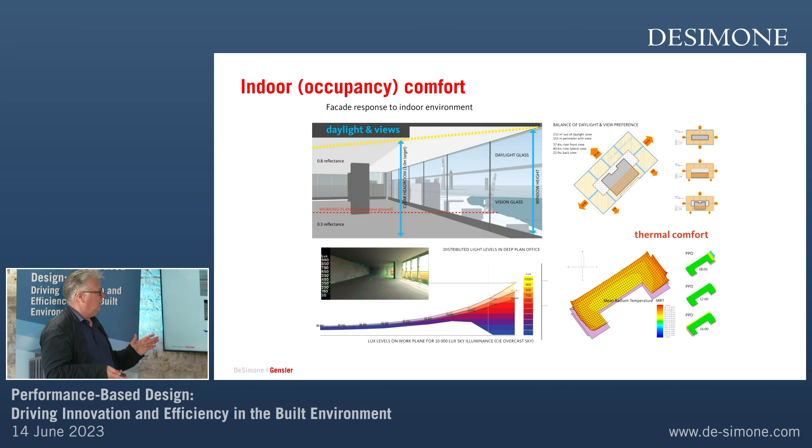So again, we're always playing this game between what is the building envelope, what are we trying to do inside, and what are we trying to keep out, so that the building systems are not blowing their bags out trying to keep everything cool. There's lots of discussion about floor to floor, what services we can thread within that, and what different systems can we use to optimize.

In China, you'll probably be aware that they have refuge levels every 10 floors or so. From memory, your first one has to be within 50 meters of the ground plane, and then you can go a maximum of 10 floors before you need another one. So even in a relatively modest building like this, 30-story, you still have a couple, and from a structural point of view, that's typically where we would put any outriggers.

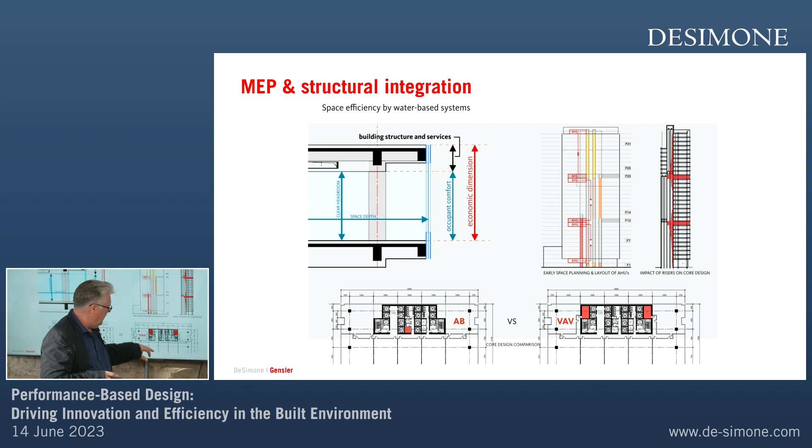This is called an area of refuge, which is typically only a fraction of the floor plate. The rest will usually have an outrigger system that connects to the columns and the perimeter, but also all the mechanical plant would be zoned in those areas too, because it's obviously a smaller floor plate in terms of what you can do with occupancy.

Then again, this last one is, again, 162 meters, 35 to 40 stories. This is down south near Shenzhen.

This was actually going to be a building for the local planning office. They were going to occupy the full building. Shanghai has just exploded, and so is Shenzhen. That part of Shenzhen was a small fishing village like 40 years ago, 14,000 people. It's now got 18 million people. So there's pretty rapid growth.

So this was interesting both from what we tried to do with the facade, but we had this rather awkward site that's in the corner. We weren't actually quite sure how we were meant to respond to all the buildings and the urban edge. You can see how many road lanes there are here.

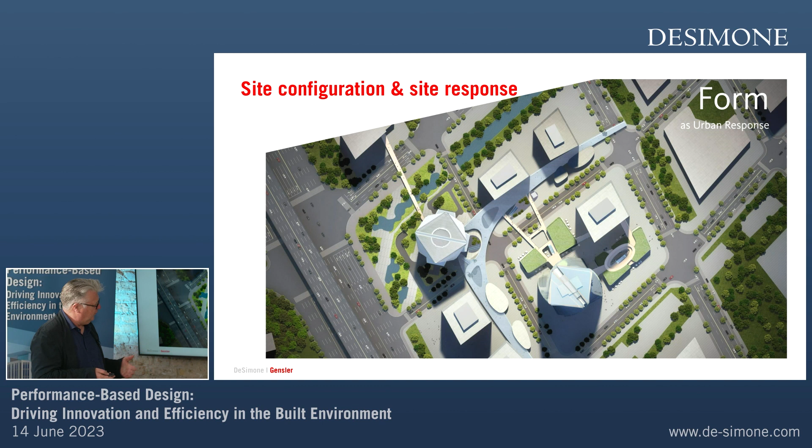This presented a tricky dilemma for us in terms of, do you do a circular building, do you do something elliptical, do you do something non-directional? The way we dealt with that was, again, for us this is still performance related, I guess. It's slightly less mathematical, but you know, what do you do?

There was also a kind of walkway very common in China, high level, that usually connects the first and second floor to all of these buildings. We actually designed this building as well, Gensler.

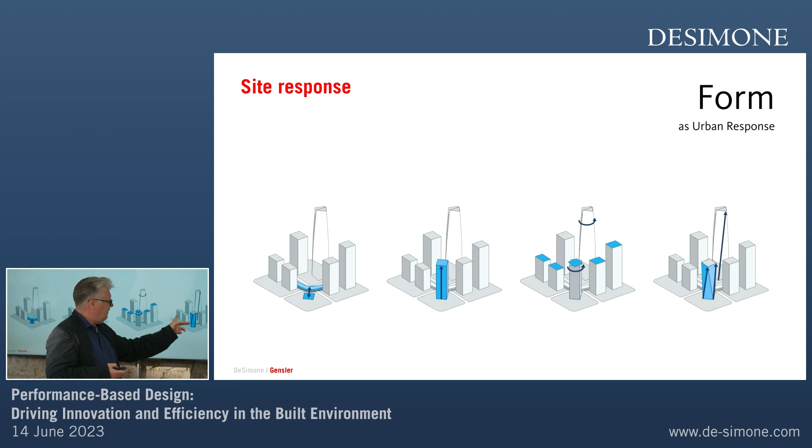So we looked at what would be a good response in terms of how do you turn that corner, how do you respond to your neighbors. The option we came up with picked up on the facade on the two streets, but also responded to the corner site. That then threw up a number of different approaches to how we would treat the facade.

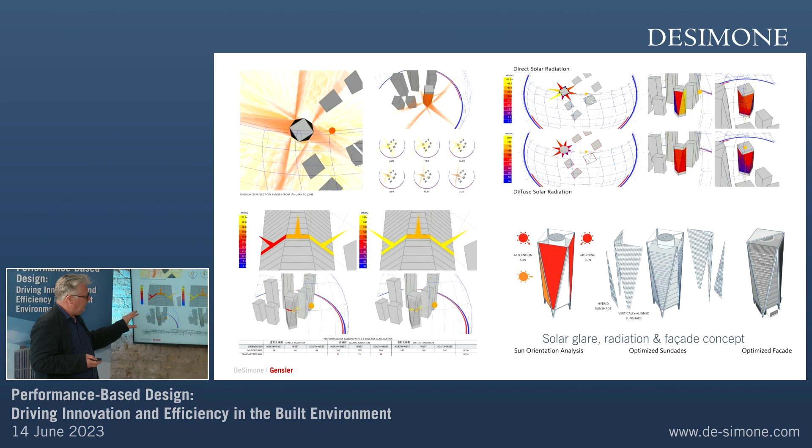This is purely a passive system here, literally a shading system on the outside of the building. We're working with a guy called Peter Simmons to try and optimize what the fins or shading should be.

Usually early morning, the east sunlight, and the west sun at setting sun, we tend to develop vertical shading. But on the south side, we tend to go for more of a horizontal approach, because particularly in this part of the world, we're nearer the equator, so the sun at midday is directly overhead. So you don't actually need much of a shelf to shade the facade. Whereas on the west and east facades, you need more of a grillage. So we went through a number of iterations.

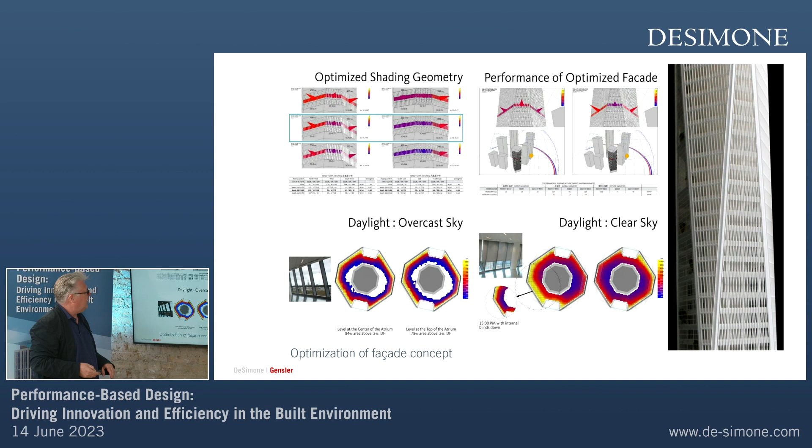So that's a very quick troll through some building ideas. They're all kind of similar size, but it's about the response, and part of it's climate, part of it is location, and part of it is how you bring all these things together. I think one interesting thing about John and Jeff's work is it's a calculation and it's finite, whereas with architecture, we're dealing with lots of things we're trying to pull together and make fairly coherent. Sometimes with tricky clients it's not always possible to lasso them all together, but we try to do that as much as possible.

So I'm not sure if that's the last slide or not. Oh, I've got a few more, sorry. I think I'm nearly there.

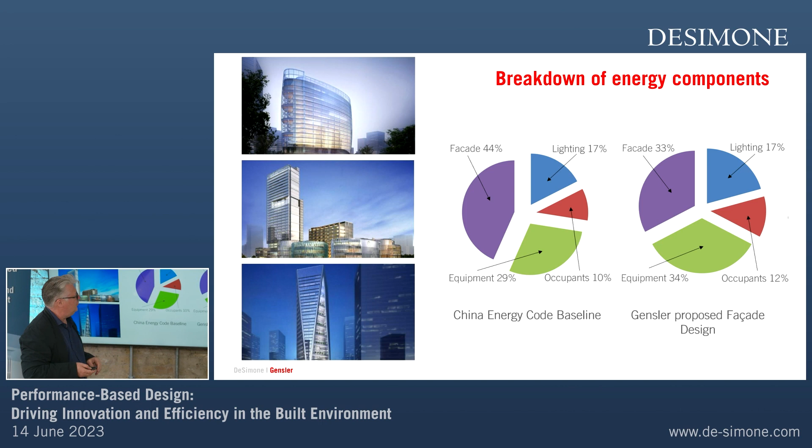So these are, again, the facade typically—this is code in terms of typically what the energy usage is. The facade is obviously a big aspect in terms of energy consumption. So what we were trying to do with the various building systems was to reduce the amount that's on the facade as much as possible, because it's usually the biggest load.

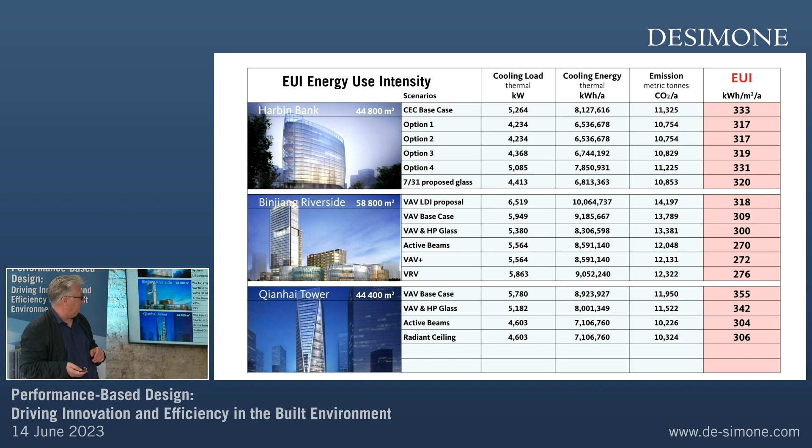So again, this is just a system whereby we're talking about basic building systems in terms of what those MEP systems should be. We always try to go active beams, radiant ceiling. Sometimes in humid climates that's quite tricky, and usually people don't want to do it, so we end up with some kind of air system. But we have managed it now and again—Pearl River Tower is actually a water-based system, 2 million square feet of water-based system, so much more comfortable.

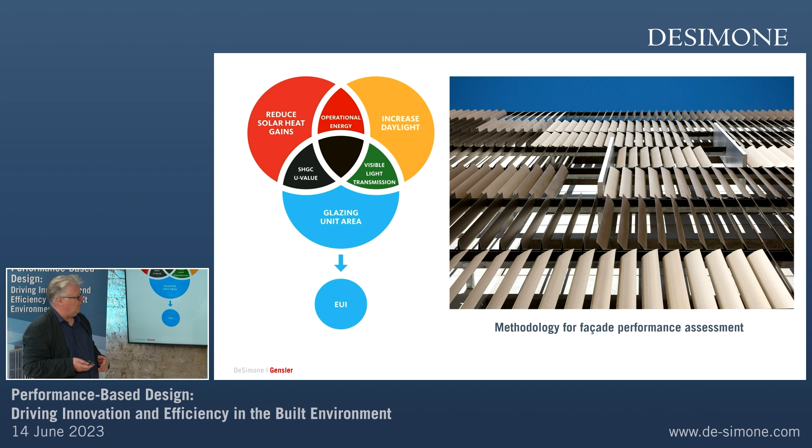So again, these are just some of the things we look at, the energy use intensity in terms of what we can do, how the architecture can mitigate some of the energy use, but also start to form some of the richness and texture of what the building looks like. We don't typically separate those two out.

Oh, I had one more slide, but it's disappeared. It's gone, been edited. I think it was actually an image of the Pearl River Tower, or the Binjiang project. I don't know how I got there either. Did I do that? Oh... I think I've been timed out. That's me.